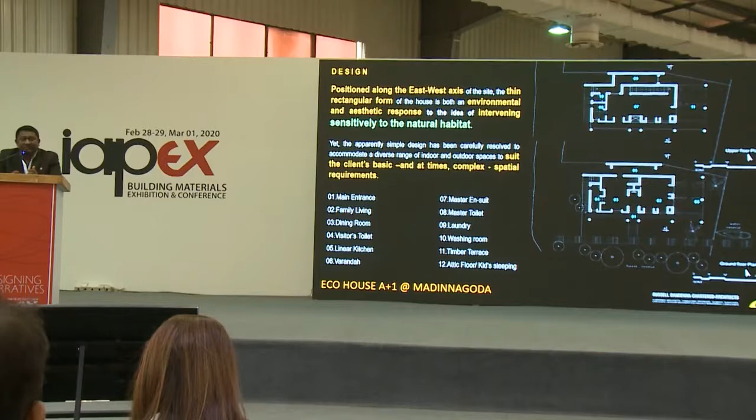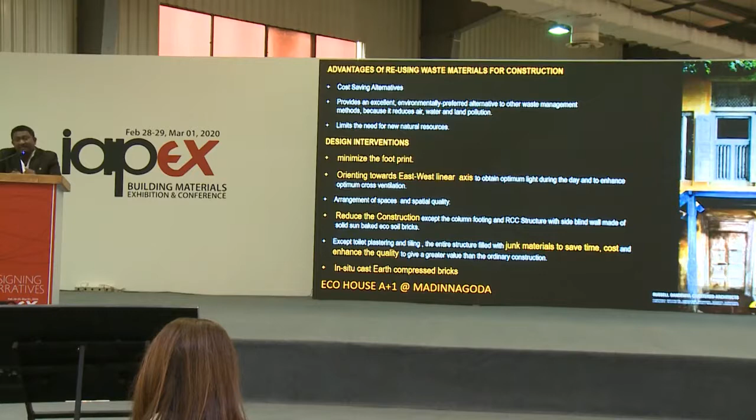The tendency and trend of Sri Lankans to sell ancient houses to junkyards at a cheaper cost allows us to find doors, windows, and various other elements. These things were used for 130 years. We went to the junkyard site and collected X number of doors, Y number of windows, one staircase, and well-seasoned 100-year-old timber as a collection before going to the drawing board.

Then we suggested to the client, look, we will do you a very low-cost house. A 1-bedroom house, low cost - it was just $20,000 we spent on that. 12 years ago, we managed to convince the rich client for this simple building.

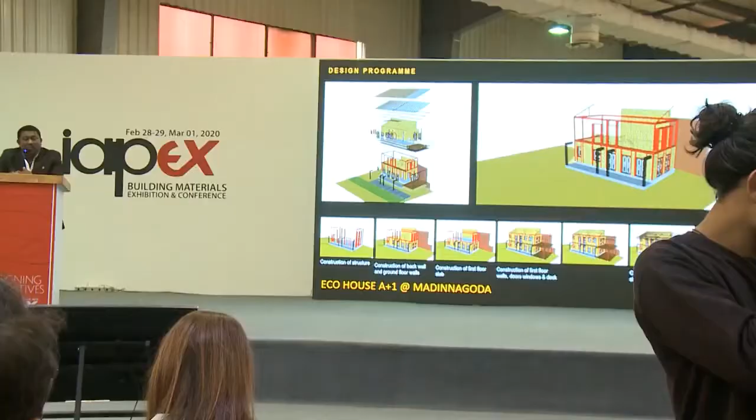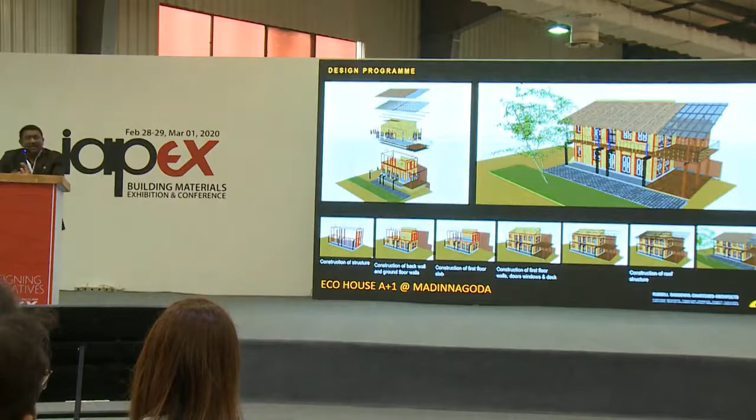Narratives are very simple. We had sun-baked earth block walls at the back, and we incorporated an RCC structure. The entire balance area was filled and fixed up with all the materials we found from junkyards - all the windows, columns, and everything we reused. So we tried to preserve nature by reusing entire structural elements and materials, except the columns.

This is my client. About 12 years ago, he had 3 kids. I asked him, for 10 years you can live happily in this house. They had only 1 master bedroom, and an attic floor you can see where the kids stayed, accessed with a collapsible ladder.

I have to say that now 2 daughters can share the upper bedroom, while the son uses the other upper bedroom, and the parents are on the ground floor now. And when the kids grow up and go for studies, the couple can use the lake villa as a rentable property.

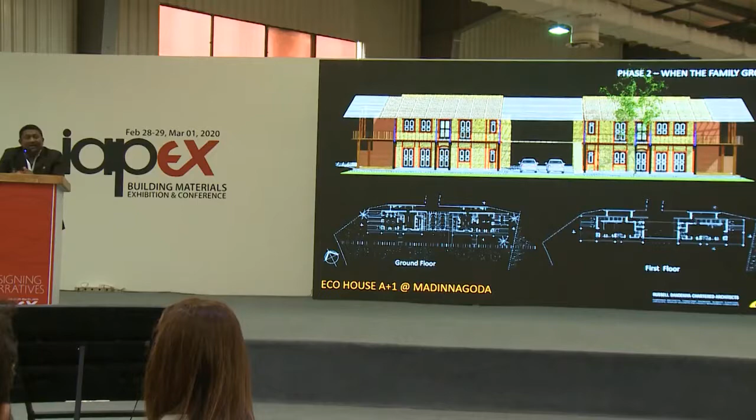Now these places are being used as storage. We can see an inverted canoe used as a built-in seat - all recyclable material used for a long time, and brick again, sun-baked earth bricks. This is how we responded to nature. It is a completely open structure and part of nature, with thresholds we created and linked with the lush green. This was published in international magazines, Domus magazine in Italy, as a zero energy building created by RDC architects.

I think during the time this is growing, kids and friends are coming, having birthday parties, and a lot of activities are happening here. This is beyond the house. They are really using it for communal gathering as well.

Actually, this is the landscape. We try to respond to nature. This is a boundaryless property in a highly urbanized area because on two sides it is surrounded by the water body. We extended our landscape towards the water body, and some people are making earning out of that. A lot of animals are coming in, you can see the monkeys on the hanging bench. This is basically a part of nature and a zero energy building.

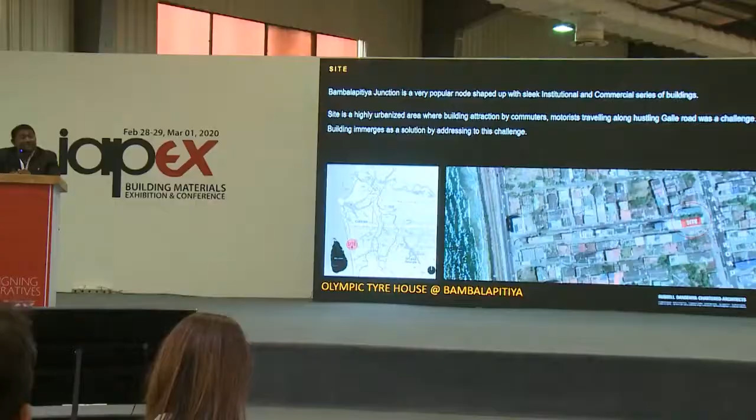Then I will move to the Olympic Tyre House, Bambalapitiya. This is a highly urbanized area in the heart of Colombo. This site is very, very expensive. When the client comes, we started telling stories, right? This land is very valuable, why not you put up a 10-story housing scheme, and on the ground floor you can easily put up a tire shop, and the payback period is just 4 years, and various other beautiful stories.

But could the client understand? No. Client can understand only the cost and the time. He just wanted a project he could complete in 6 months. He was so rushed. By the time we thought we should not talk and justify, we used narratives justifying the cost. This was done 6 years ago. Using shipping containers was the novel idea at the time, and all scrap metal we used. We suggested the client a very simple building.

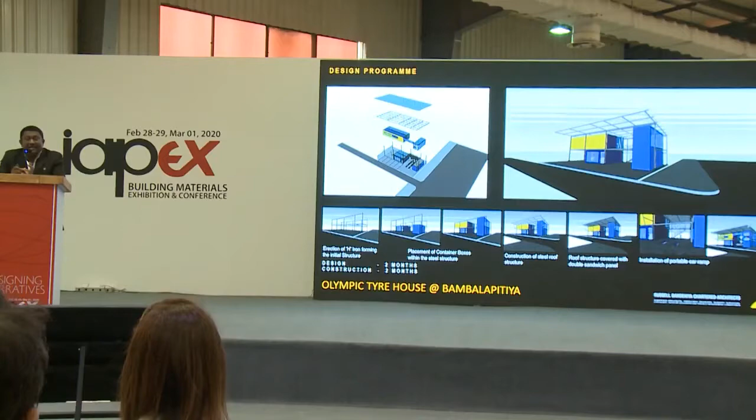This is our presentation to the client. The design period was just 2 months. We got little fees, but construction again took 2 months. But our idea and justification was very successful.

We created containers, used the containers, and brought them here. You can see how we came up with the context, how we generated it to the context. We responded and we took the same profile of the next building. We took the entrance not from the main road but the other road, to protect one single tree. You can see how much pressure there is on that only tree in that area of Bambalapitiya, a very, very busy road.

In Sri Lankan law, it was prohibited for people to invite customers to the shops. Our Michelin man is all the time inviting. Our open single pitch roof is again an invitable character. You have to believe they covered the entire construction cost within 3 months by selling alloy wheels and tires. The entire containers we made on the outside and brought here, stacked one on the other, and we put a roof only, made out of scrap metal except the roofing sheets.

Then I will move to the Jiffy Products building, where buildable versus unbuildable. This site again is located a little bit far from Colombo. You can see from the sky what man made to the green environment where our site is located. It's an industrial zone, Mirigama.

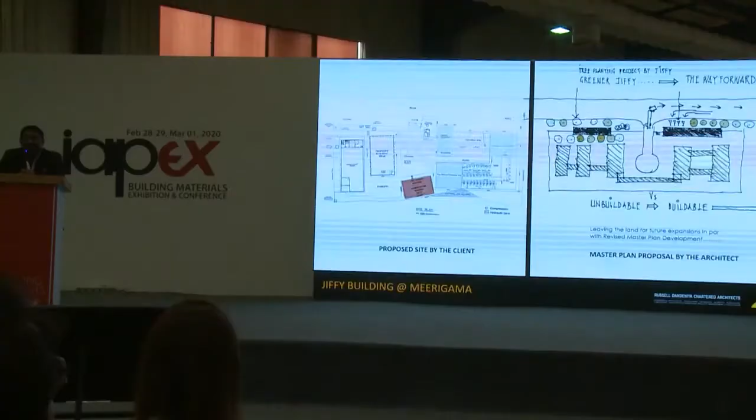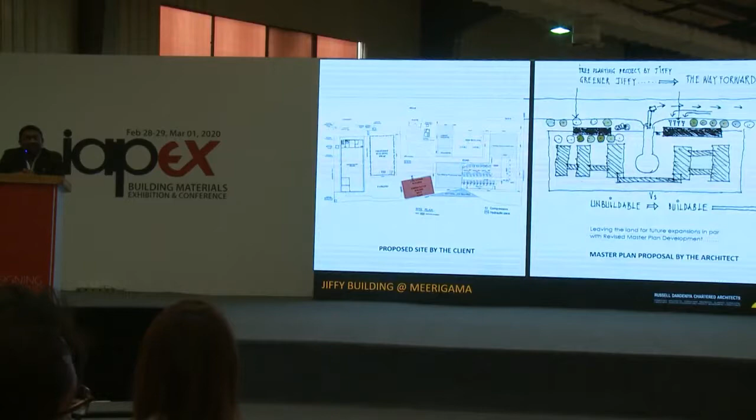So this is the site we were given. The red spot was the site. He had his master plan, a 6-story office building. When we were at the site, at the left-hand corner, there was a factory building. They are basically in plant propagation and growing media export. Their overseas clients and buyers are coming here. They want a state-of-art factory.

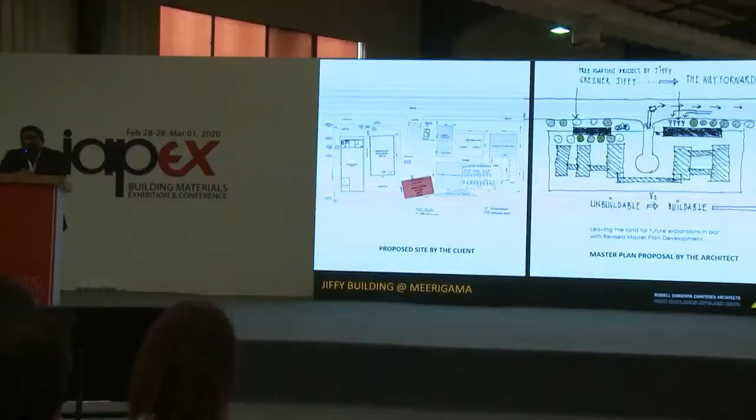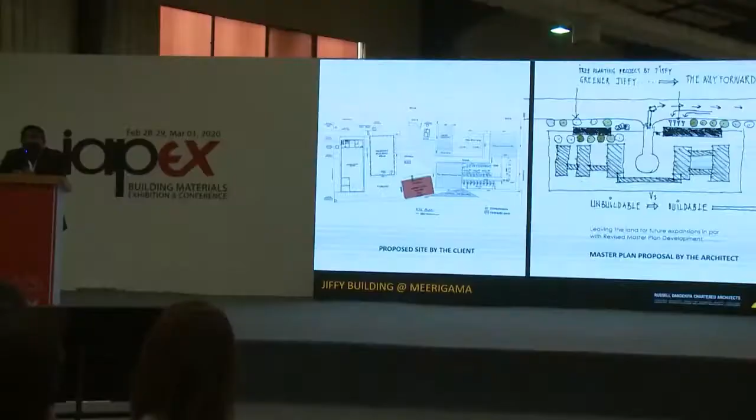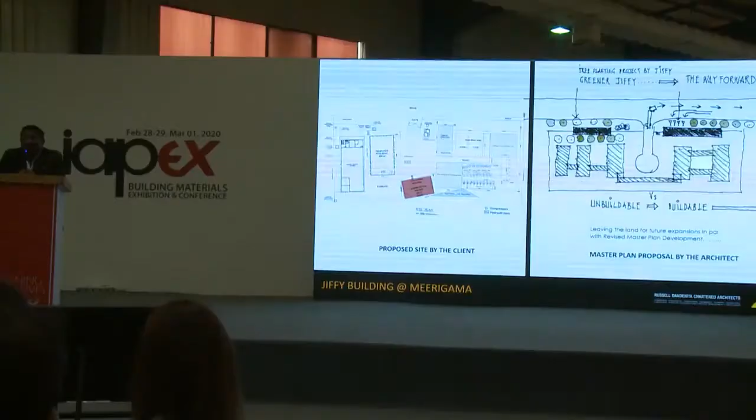We started again with narratives and stories. We proposed a master plan and told him his idea of placing the office in the central building was wasting space. Why not save land instead? Land is very valuable. We suggested placing the building at the edge of the site, which was a 30-feet steep slope where no building could be possible. We suggested a long and linear building along that edge, which was understood because it's low cost as well as saving land. That was the most convincing part.

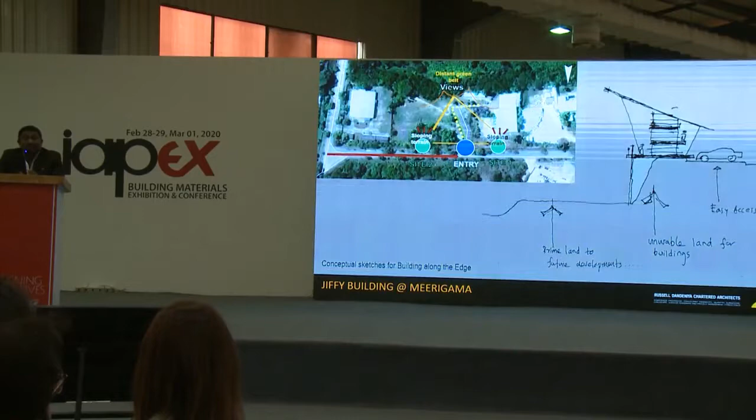This is the first sketch I did and showed to him. We both met our minds. He is from a government school, I am also from a government school, and low cost is our idea. This was my first presentation to him. We used only the foundation structure; the rest of everything we designed using scrap metal.

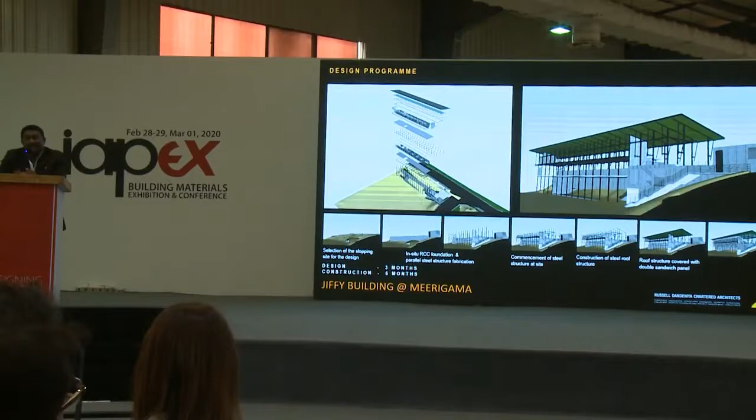We sized it according to the market available sizes for aluminium, glass and everything. Even the toilet sizes were set as per the tile sizes, no cutting, no wasting. This was done 3 years ago.

We proposed him $535,000 US. He was very happy because it was low cost as well as saving his land for future development. It took just 3 months for design, but we got good money, and construction took 6 months.

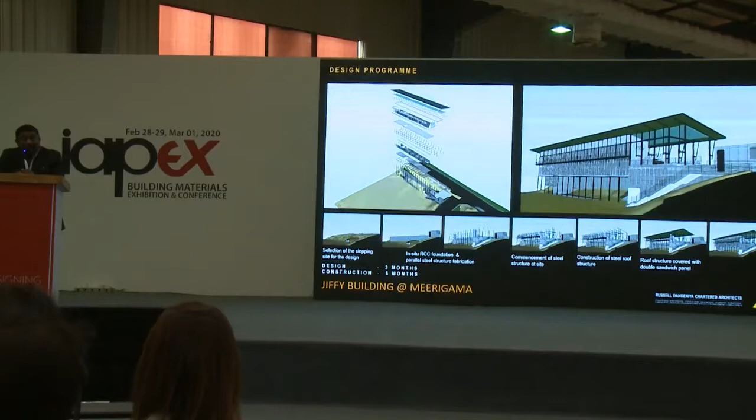This is the building from outside. We didn't axe down a single tree along the steep slope. It is a totally transparent, linear, see-through building.

On the upper level we placed offices, and on the middle level we placed the conference room and meeting room, which are extendable. If more meetings or more people come, they can connect these meeting rooms. You can also see the factory from the office as well as the conference room.